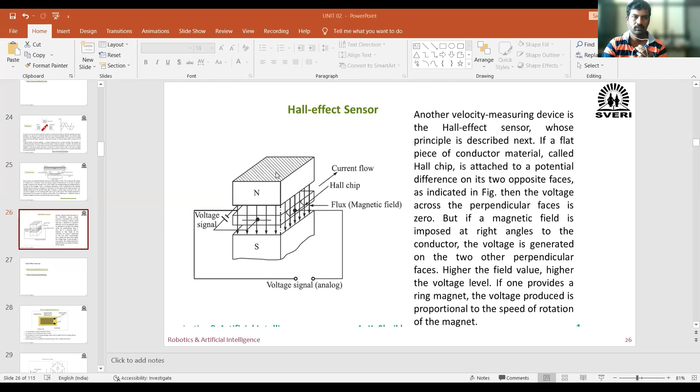In the last session, we finished up to the Hall effect sensor. We also covered strain gauge based sensors, piezoelectric based sensors, and at last we saw the limit switches. In the last lecture we finished up to this point.

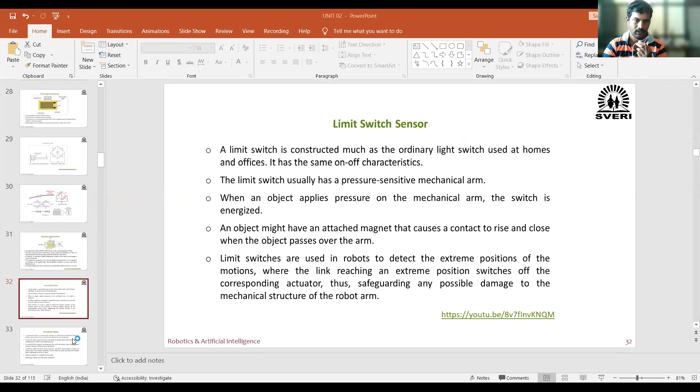Today we will start with the next topic, pneumatic switch. We'll look at the function of the pneumatic switch and where we can use it. All these are some of the sensors used in our robots.

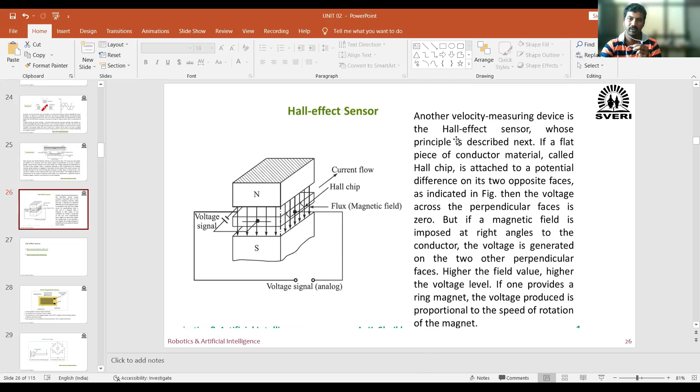Next we have seen videos related to that one. Again, strain gauges - yesterday we saw strain gauges. These gauges are used to measure the force and strain.

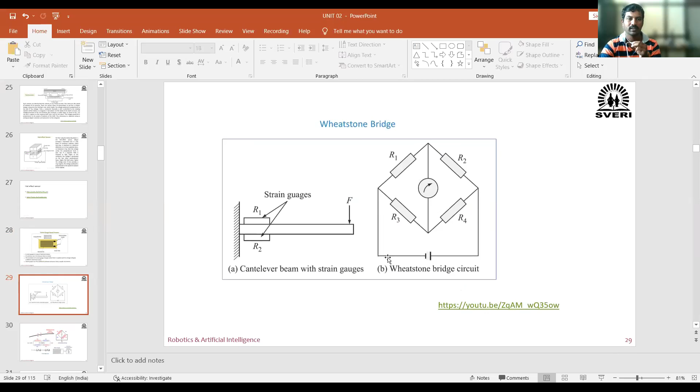In that strain gauges we are using this Wheatstone bridge circuit. Last time we discussed this. Next, piezoelectric based sensor.

If you put some piezoelectric material like quartz between two metal plates, the property of quartz is that if we apply force on it, it will produce a small voltage, some microvolts, inside that material. The amount of voltage we measure can be converted depending on how much pressure is produced inside it.

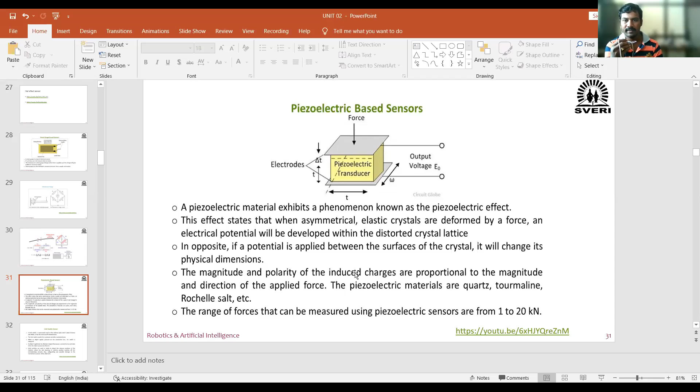Again, last time we have seen limit switches and where we can use them. A limit switch is similar to our on-off controllers or the switches in our home appliances. The function of a switch is to turn on and off that light, fan, or any electric instrument.

Similarly, in our robots also we have to feed switches to turn on and off, and in front of that switch we have written 'limit'. Limit means for a specific interval that switch should be on, either on or off. For that we require this limit switch sensor. There are different types of limit switches.

Pressure sensing limit switches are there, or we can say hydraulic limit switches, pneumatic limit switches, electrical limit switches are there. Those are used in our home appliances - these are the electrical switches. Similarly, switches we can put inside our robot to control the movement of the robot.

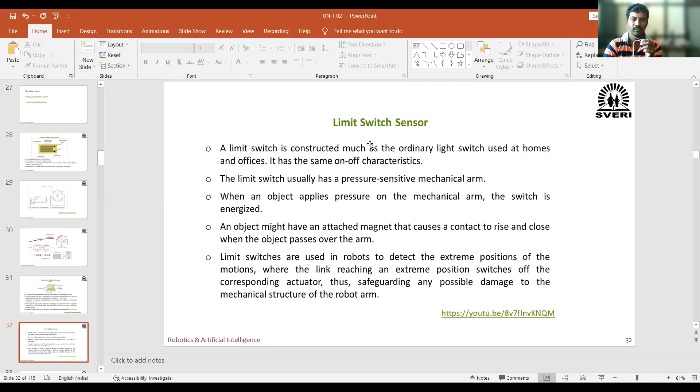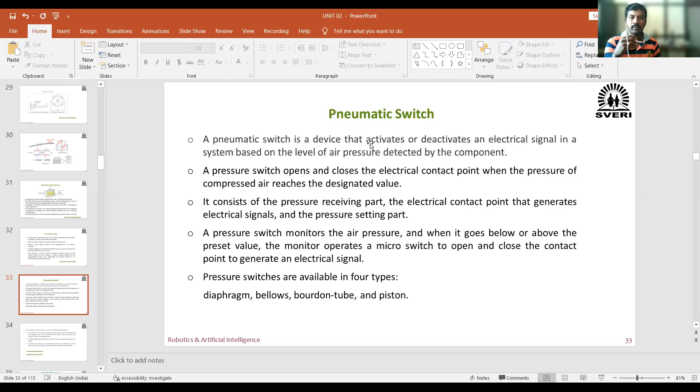We have seen the video of how actually the limit switch is working. Now we will move towards the next switch, the pneumatic switch. These switches are used for activating and deactivating electrical signals, or simply to control the movement of the robot arm.

This pneumatic switch is similar to our electrical switches. The only difference is, to control that switch, we require pneumatic power, meaning air power. With the help of air power, we can control the switch movement, either on or off, based on the level of air pressure detected by the component.

You simply remember that a pneumatic switch is similar to our electric switch, used for turning on or off electrical signals with the help of pneumatic or air pressure. If we turn on or off with the help of air pressure, we call those switches pneumatic switches.

A pressure switch opens and closes the electrical contact point when the pressure of compressed air reaches the designated value, meaning a certain amount. Suppose you take the example of your cooker.

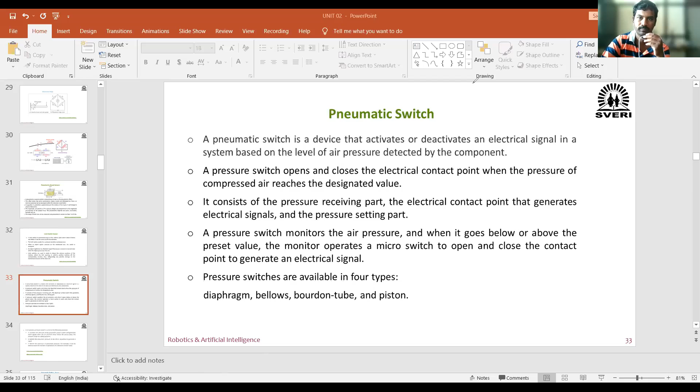Now we will go to the next slide. I will close this one. Why it is not going?

Pneumatic pressure switches are used for the following purpose. What is the purpose behind using these switches? It monitors the pressure of pneumatic power source and generates alarm signals when the air pressure drops below the preset value. The pressure stops for safety purpose.

Safety purpose also we can use such kind of pneumatic switches. It detects the pneumatic pressure of the driver apparatus to generate a signal. It detects the operations of pneumatic pressures. For example, it can be used to count the number of operations of a direction control valve.

Okay, one video with us. Just we will see that and we will understand how actually it works, and after that we will see the rest.

Let's take a quick look at how an SOR mechanical pressure switch works. It all starts when liquid or gaseous pressure moves a piston that in turn operates a switch. The process puts its pressure on one side of the piston and the switch is on the other. Add a spring so the piston can return to its original position when the pressure drops, and you have a mechanical pressure switch. Pretty simple, huh? However, while early pressure switches were sound in principle, they didn't perform well because of some inherent problems. First of all, because the piston must travel a long distance, it subjects the sealing ring and the switch to considerable wear and leakage. SOR solved those problems. In 1956 it started using a non-moving, O-ring seal design.

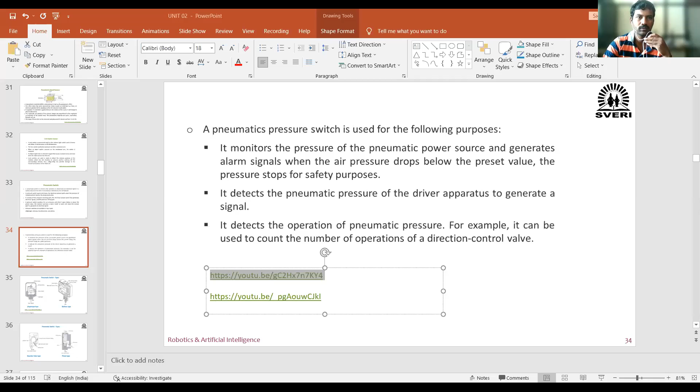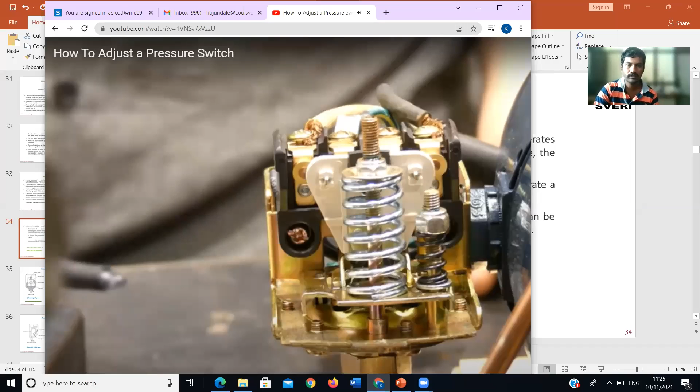Remember, before attempting any adjustments, be sure to turn off the breaker or disconnect power going to the switch or to the pump. You can find the factory preset settings inside the cover or on the box of the pump. This particular one is preset.

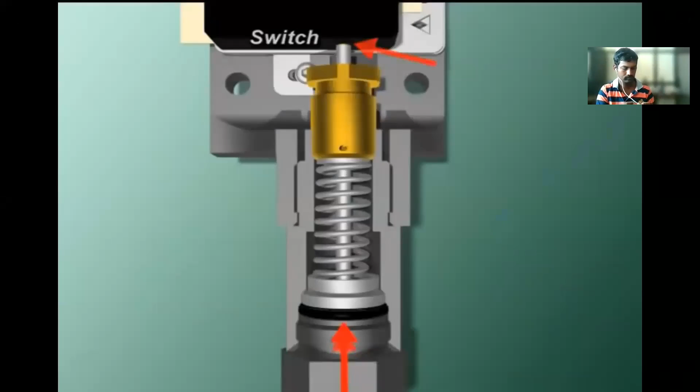Let's take a quick look at how an SOR mechanical pressure switch works. It all starts when liquid or gaseous pressure moves a piston that in turn operates a switch. The process and its pressure are on one side of the piston, and the switch is on the other. Add a spring so the piston can return to its original position when the pressure drops, and you have a mechanical pressure switch.

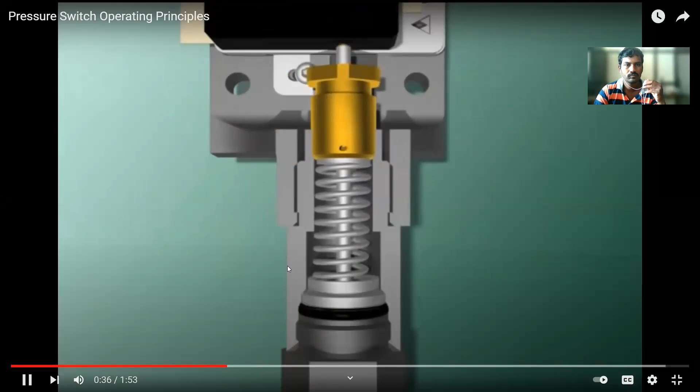Pretty simple, huh? However, while early pressure switches were sound in principle, they didn't perform well because of some inherent problems. First of all, because the piston must travel a long distance, it subjects the sealing ring and the switch to considerable wear and leakage.

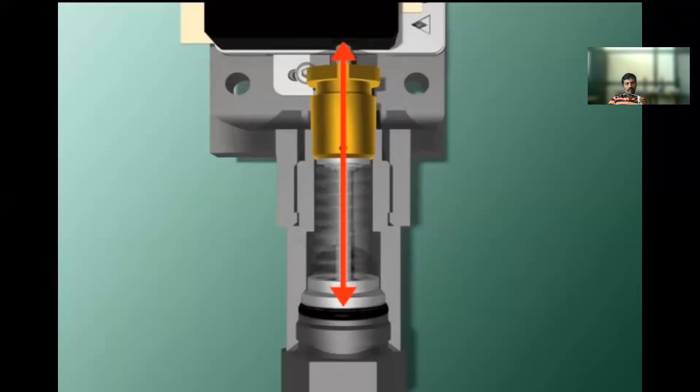SOR solved those problems in 1956 by using a non-moving or static O-ring and a diaphragm between the process and the piston head. The static O-ring and diaphragm keep the switch dry. For that matter, even the piston stays dry. And because the O-ring remains static at all times, it doesn't suffer the wear a moving part would.

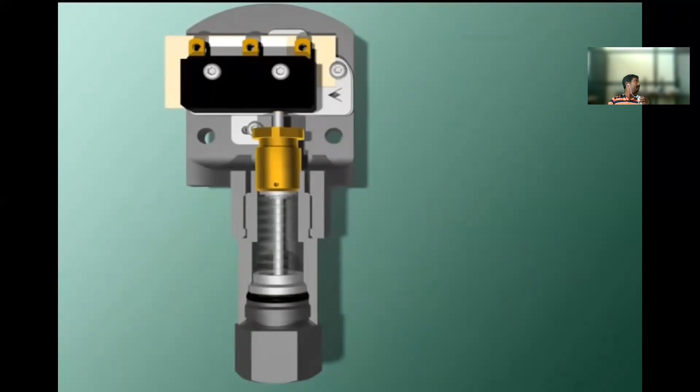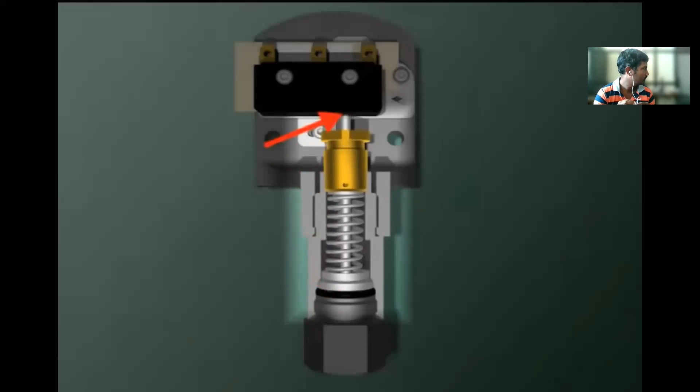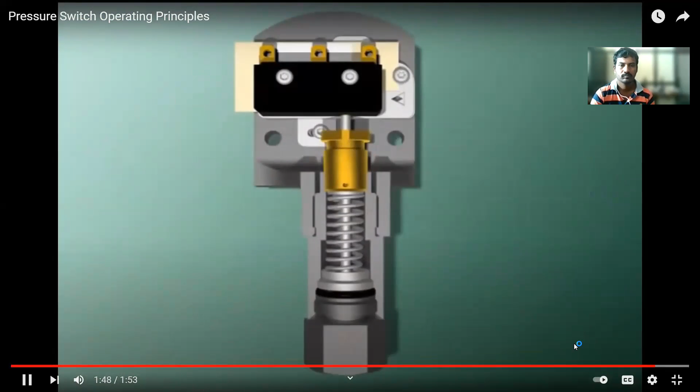Let's review. Pressure moves the diaphragm, which pushes against the piston. A calibrated spring and area of piston determines how much pressure it takes to move the diaphragm. As the diaphragm moves, it flexes and presses against the switch. The switch activates to control whatever causes the pressure to build up, such as the addition of reactive chemicals to the mixture, amount of gas or liquid in the process container, and so on. When the pressure diminishes, the spring takes over and the piston returns to its original position.

Okay, I hope you understood this one. So one more we have. Just let's see how it actually works.

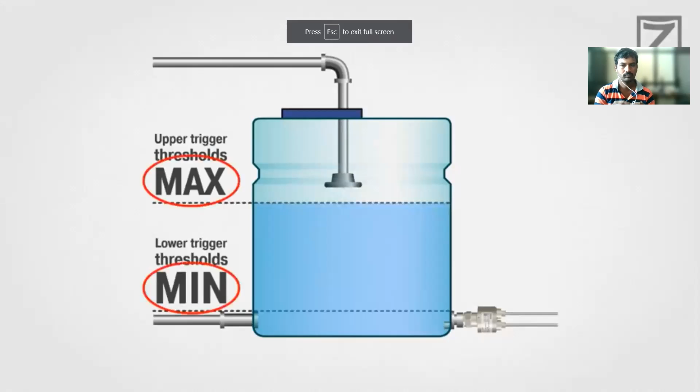There are several common applications, such as activating a light or sound alarm when a certain level or pressure threshold is reached. The switch has upper and lower trigger thresholds. A pressure switch can be used to switch the pump on or off when the liquid level reaches the lower or upper limit.

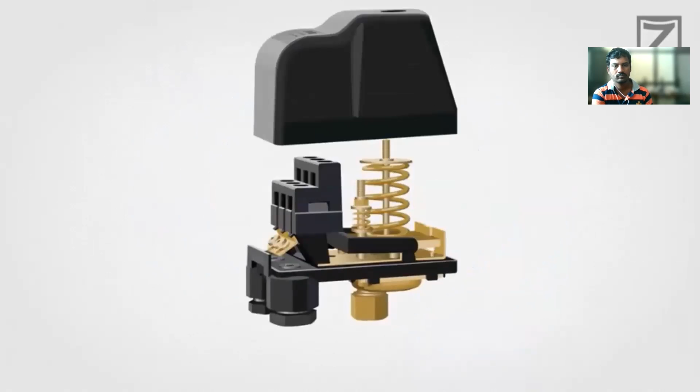Electronic and mechanical pressure switches. There are two main types of pressure switches: a mechanical pressure switch and an electronic pressure switch. In a mechanical pressure switch, a diaphragm closes and opens the circuit when the medium pressure rises or drops to a certain set value.

Electronic pressure switch: An electronic pressure switch is based on a pressure sensor element and an electronic board that ensures precise switching thresholds, along with a virtually wear-free solid-state relay to switch the load.

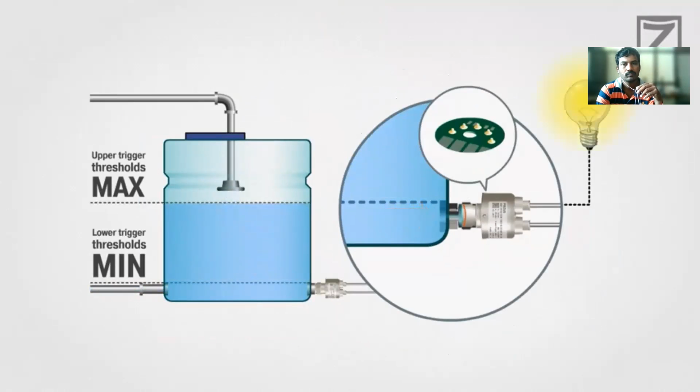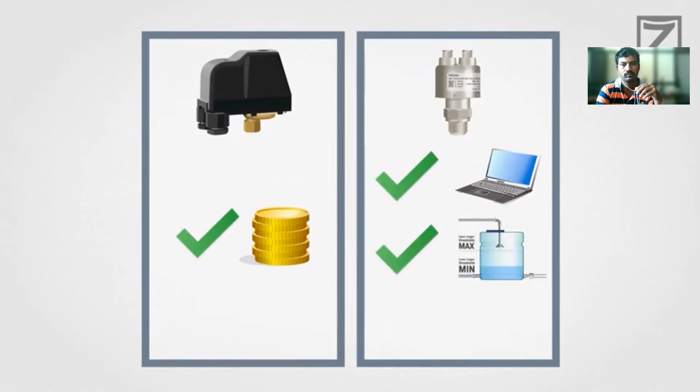The pros and cons of mechanical and electronic pressure switches: mechanical switches are usually the cheapest solution. Electronic pressure switches are normally more accurate and reliable than mechanical ones. They feature easy programming of the operation logic and triggering thresholds. An electronic pressure switch can be equipped with analog and digital outputs and thus also serve as a pressure transmitter. Various models have digital displays for easier measurement reading.

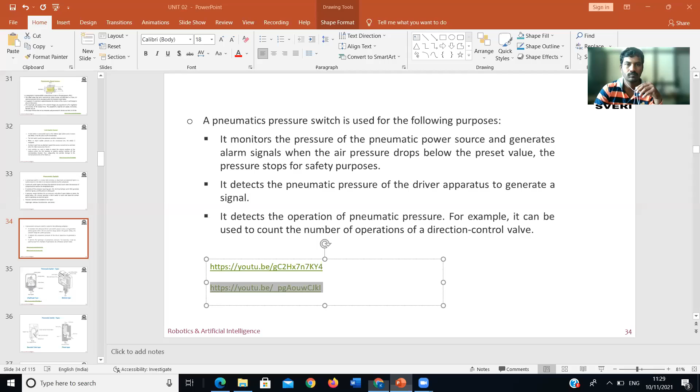Okay, I hope you understood. Now we will see there are different types of pneumatic switches. First one is diaphragm type, bellows type, Bourdon tube type, and piston type.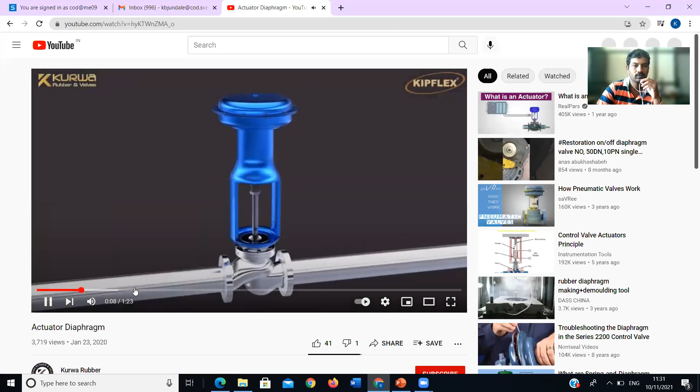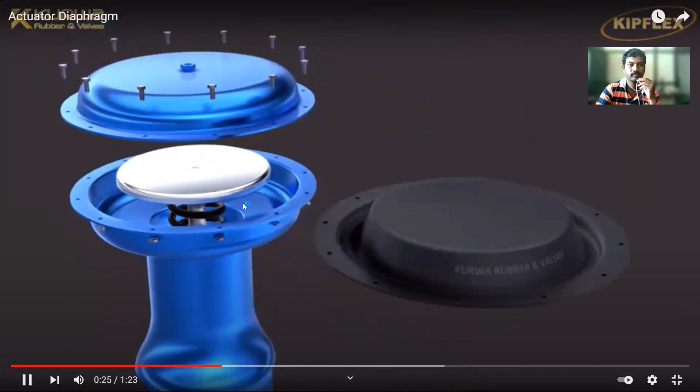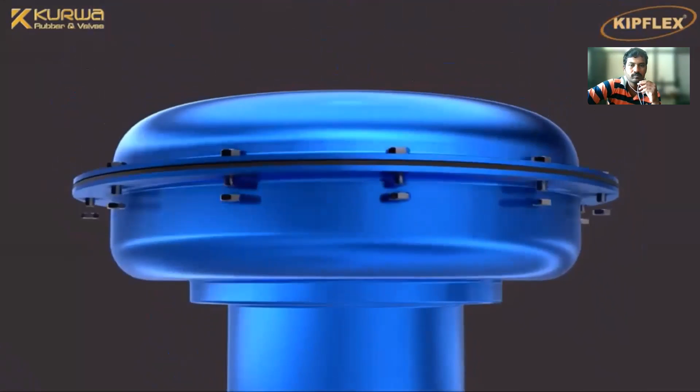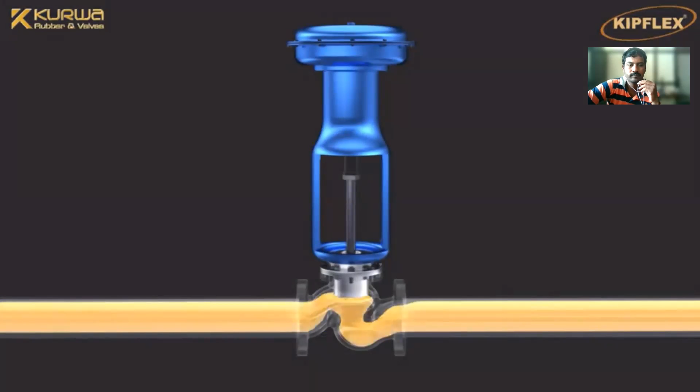You can see this one in diaphragm. Yes, see this one. This one is the diaphragm. Below that spring is there. Plate is there, actual diaphragm, this one. And this is closed condition. When it exceeds the pressure, it will open. Okay, such kind of. I hope you understood this diaphragm type.

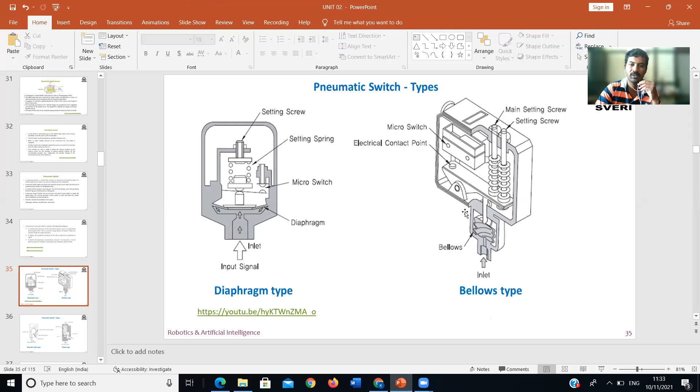Next, bellow type. In bellows, you can see here there are two springs. This one is the bellow. Bellow is similar to your balloon, and if we extend it - if more air goes into a balloon, it expands. Similarly, if we increase the pressure, it will start expanding and connect to the switch, and depending upon it, it will adjust the pressure. This one is the bellow type.

Next, Bourdon tube. In Bourdon tube, one Bourdon tube is consist. If we increase the pressure, it will start deflecting this tube. Due to deflection, it will connect the switch and release the pressure. And the last one is the piston type. We have seen that in the first video. It is similar to your piston type pneumatic switch. When we increase the pressure, this piston will move to the upper side and connect that electronic switch, and it will release the pressure.

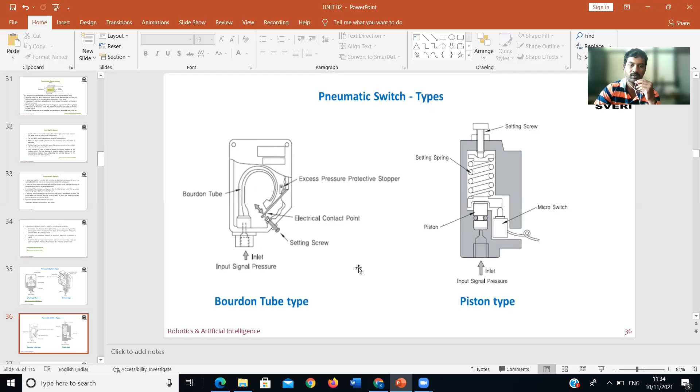Next, pressure transducer. This device is used to convert mechanical pressure into electrical signals. Whatever mechanical pressure is there, the work of converting it into electrical signal is done by our pressure transducer.

There are different types of pressure transducers available, again depending upon the fluid. If air is there, we call it pneumatic pressure transducer; if oil or water, then hydraulic pressure transducer. There are different types of fluids we can use to convert pressure into electrical signals. Simply remember that a pressure transducer is an element that will convert pressure into some electrical signal.

Whatever mechanical or electrical element it is, that element is called a transducer. Transducers are variable pressure sensors used to measure deflection and resistance. The producing signal will be either voltage, current, or frequency based on applied pressure. This pressure transducer, depending upon it, will generate either voltage or frequency.

Over the years, the terms sensor, transducer, and transmitter have become confusing because they're often used interchangeably and indiscriminately by different vendors. The terms sensor and transducer have been around for a very long time, but in the world of process control, the term transmitter is not very old. In particular, the term transducer is tossed around as a name for many devices and instruments. If you conduct a web search of the terms sensor and transducer, you'll get lots of different definitions. Sensor and transducer have often been used as synonyms.

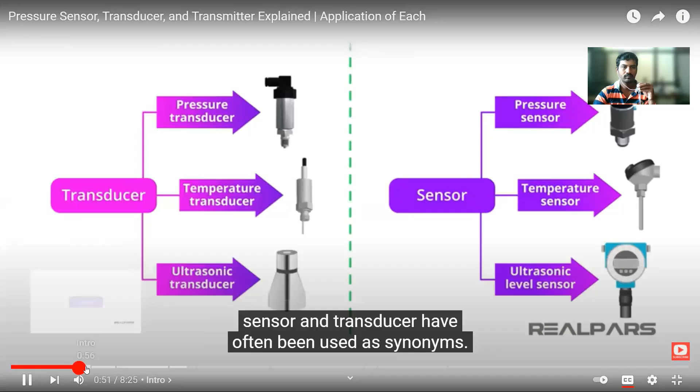Let's start with sensors. A sensor is a device that makes physical contact with the variable being measured, detects changes, and provides a corresponding output signal that can be measured.

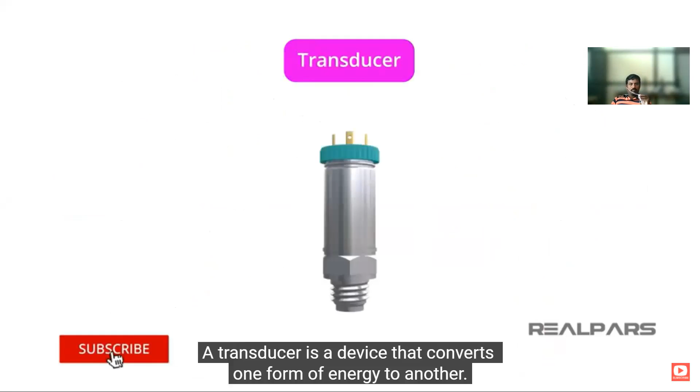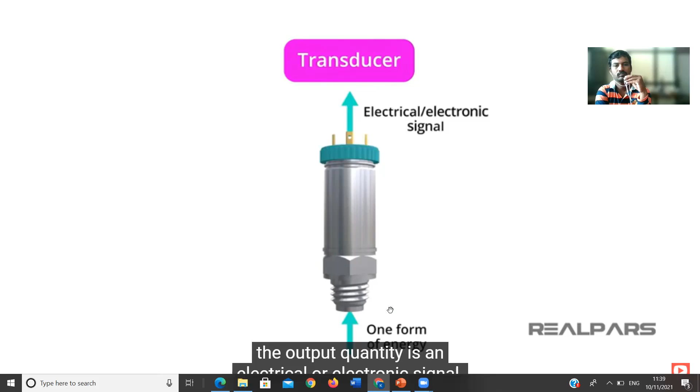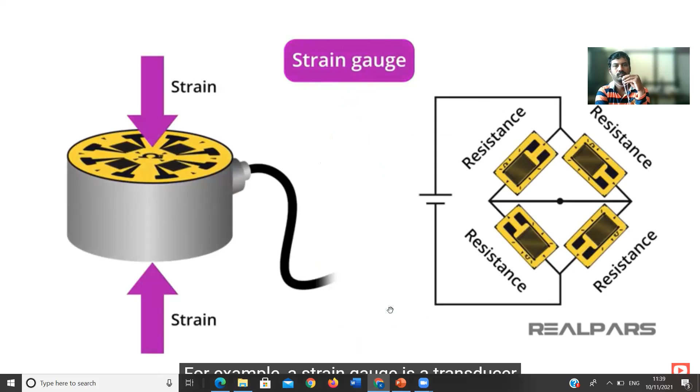A transducer is a device that converts one form of energy to another. A transducer provides an output quantity having a specified relation to an input quantity. In the field of instrumentation, the output quantity is an electrical or electronic signal. So we say that a transducer measures pressure, load, force, or other states, and converts the reading into an electrical or electronic signal. For example, a strain gauge is a transducer whose resistance value changes proportionally to the strain it experiences.

Here's an interesting statement: all sensors are transducers, but not all transducers are sensors. What do we mean by that? Well, consider a loudspeaker that converts an electrical signal into motion. The loudspeaker is a transducer, but not a sensor.

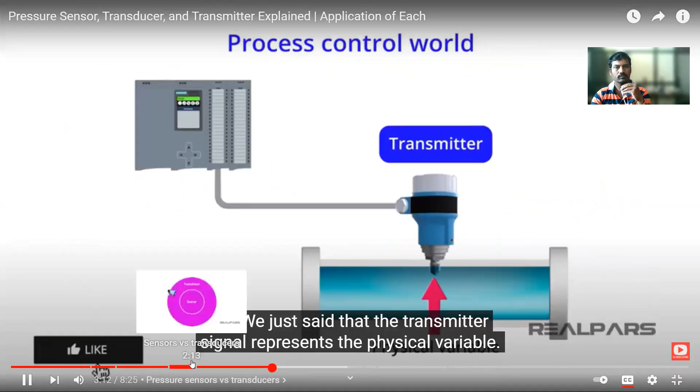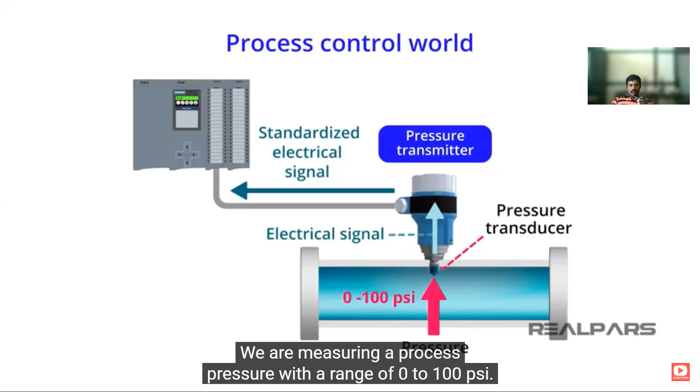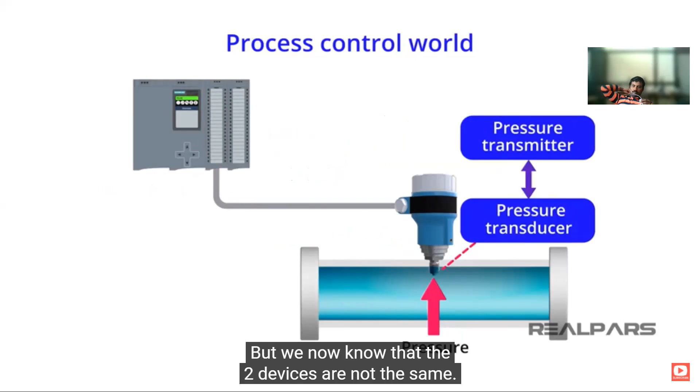Our sensor transducer performs the initial measurement and converts it to an electrical signal of 0 to 3 millivolts. The transmitter then converts that signal to a standard signal of 1 to 5 volts, which is received by a PLC analog input module. Many vendors use the terms pressure transmitter and pressure transducer interchangeably, but we now know that the two devices are not the same. So it's buyer beware. If you're curious, conduct a web search of the two terms.

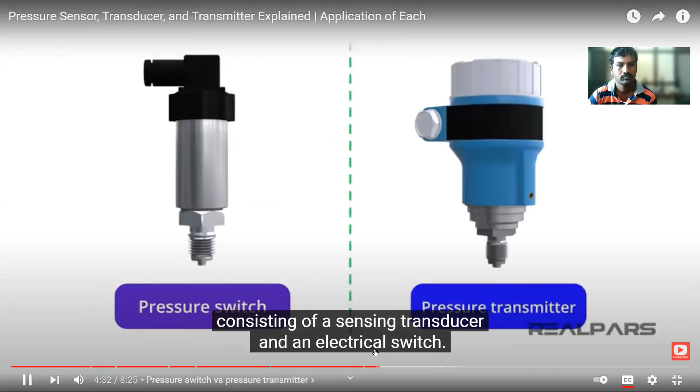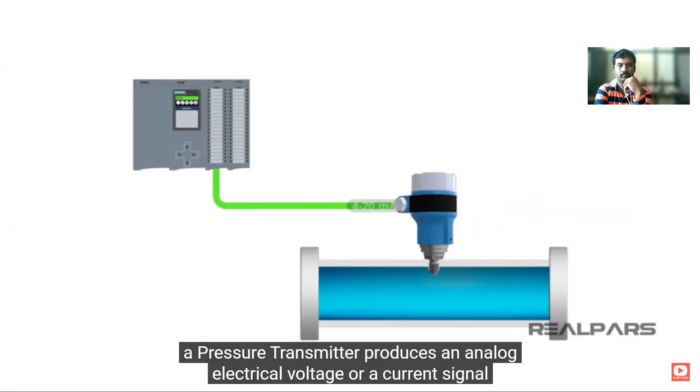Is a pressure switch different than a pressure transmitter? As we've already discussed, a pressure transmitter produces an analog electrical voltage or current signal representing 0 to 100% of physical process pressure. A pressure switch has electrical contacts that open and close at a specific pressure.

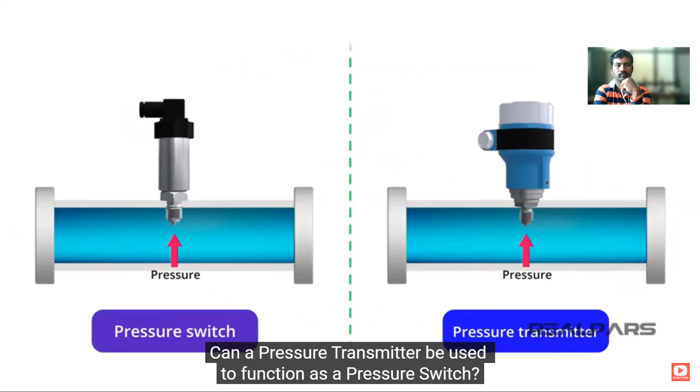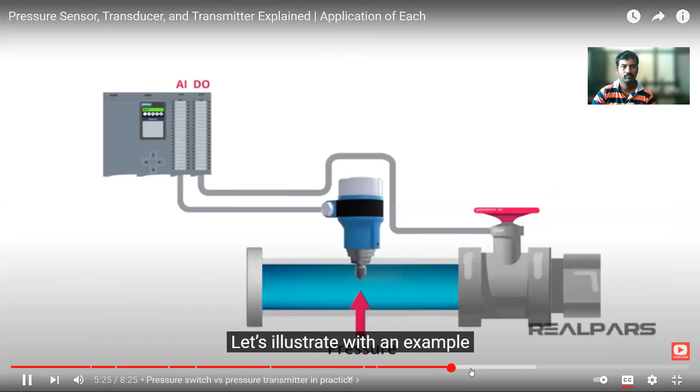Can a pressure transmitter be used to function as a pressure switch? The answer is absolutely yes. But is it really worth it? First of all, a pressure transmitter is larger, more expensive, and for example, a transmitter calibrated to produce a 4 to 20 milliamps output for a pressure range of 0 to 100 psi would require an analog input module on our PLC, and we'd need to scale the analog module and insert code into the PLC.

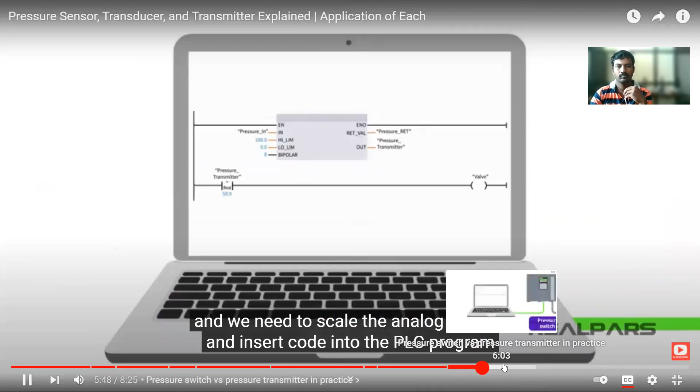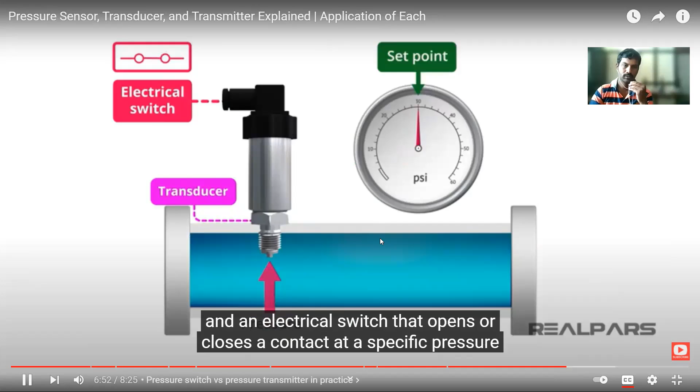To start with a sensor: a sensor is a device or element that performs the initial measurement of a physical variable. All sensors are sensing transducers, and an electrical switch that opens or closes a contact at a specific pressure works differently. A pressure transducer is a device that converts the physical measurement to an electrical signal, and when applied as a pressure switch, it is not quite the same thing.

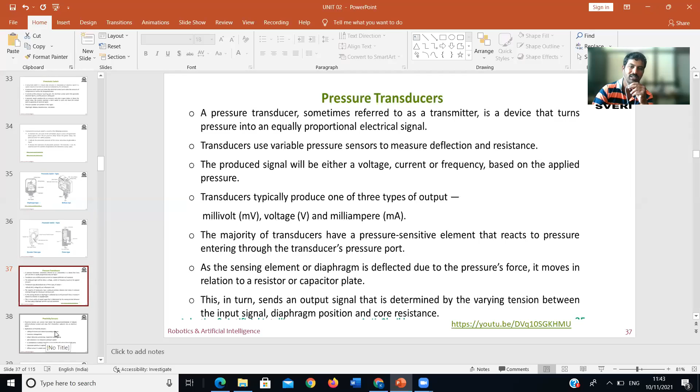Next one is the proximity sensors. This one is very important because nowadays all machineries are using these proximity sensors. Previously they used limit switches to detect the position of any object. If you wanted to define the position of an object, at that time they used to use limit switches. But now you can see everywhere they are using proximity sensors.

Proximity sensors are sensors that detect the movement or presence of an object without physical contact. So it is a sensor whose job is to sense an object, whether it is in movement or present in front, it will detect it. This proximity sensor does this work without touching the physical object - it will sense it. Such a sensor is what we call a proximity sensor, which detects movement or presence without physical contact, meaning without touching the object.

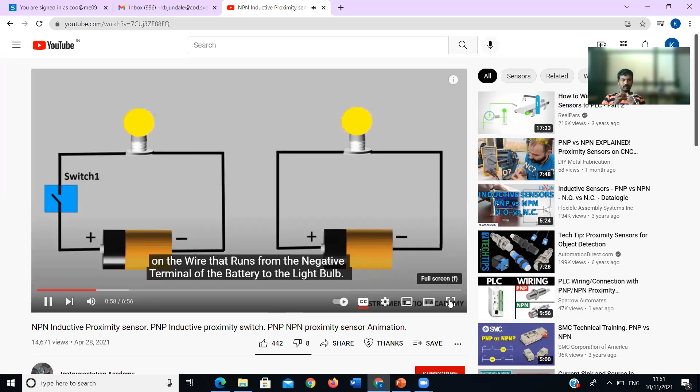of the bulb. This can be done in two ways. The first way is to install switch on the wire that runs from the positive terminal of the battery to the light bulb. The second way is to install switch on the wire that runs from the negative terminal of the battery to the light bulb.

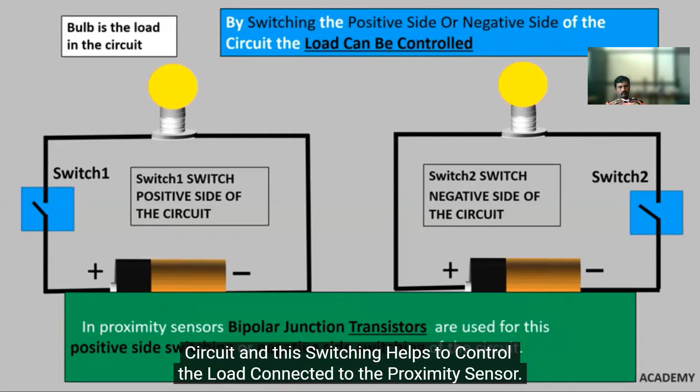Switch 1 is set to switch the positive side of the circuit, while switch 2 is set to switch the negative side of the circuit. Here the bulb connected in the circuit is the load. By switching the positive side or the negative side of the circuit, the connected load can be controlled. In proximity sensors, bipolar junction transistors are used for this positive side or negative side switching, and this switching helps to control the load connected to the proximity sensor.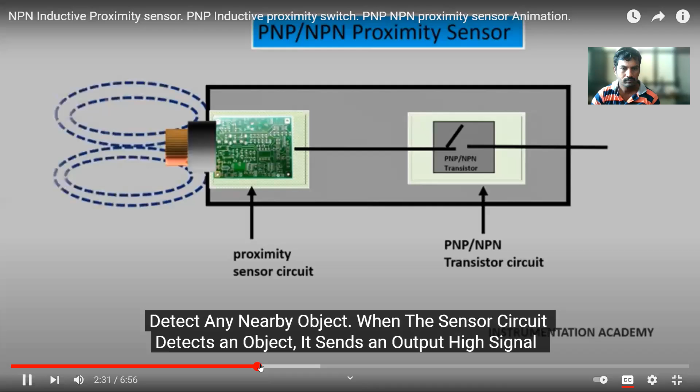Bipolar junction transistors are of two types, NPN transistor and PNP transistor. A PNP or NPN proximity sensor consists of a proximity sensor circuit and a PNP or NPN transistor circuit.

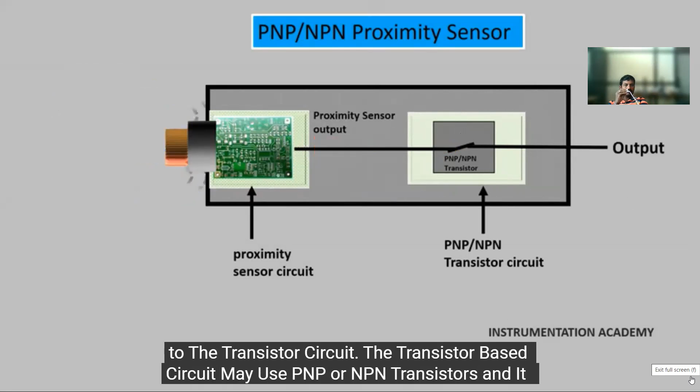The purpose of the sensor circuit or proximity sensor circuit is to detect any nearby object. When the sensor circuit detects an object, it sends an output high signal to the transistor circuit. The transistor-based circuit may use PNP or NPN transistors, depending on the application that sensor is used for.

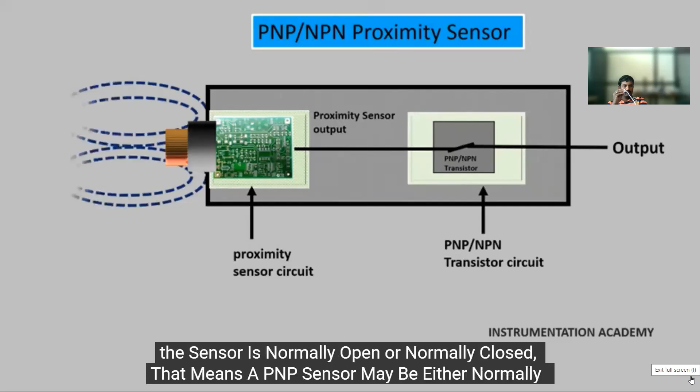PNP and NPN has nothing to do with whether the sensor is normally open or normally closed. That means a PNP sensor may be either normally open or normally closed. Likewise, an NPN sensor can also be normally open or normally closed.

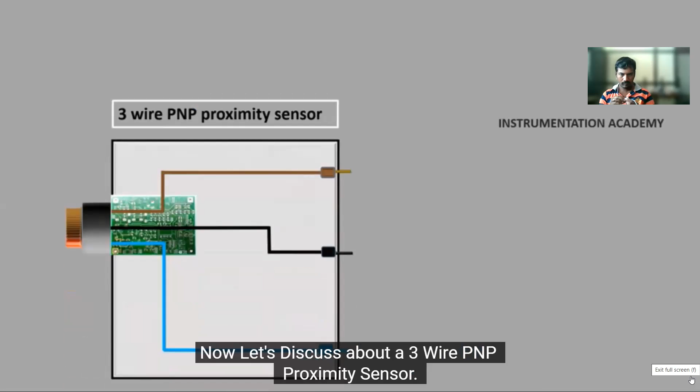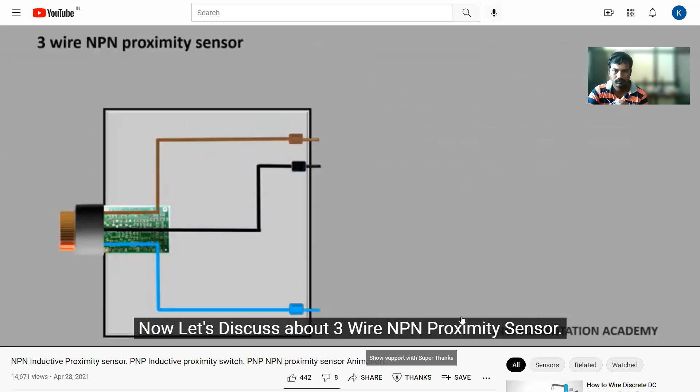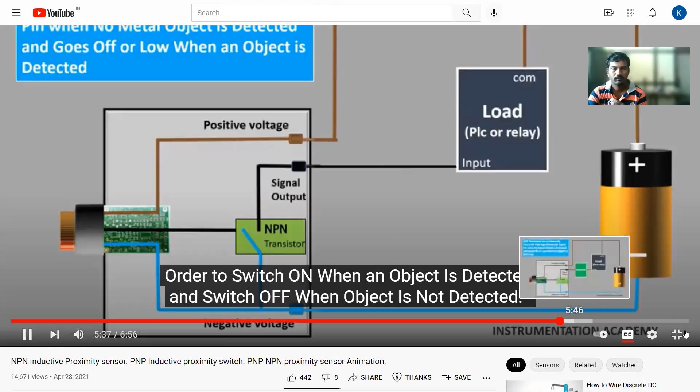As NPN transistors are naturally on, they emit a high signal on the signal line that has a voltage just below the voltage fed into the positive voltage pin, that is the brown pin. This high signal is fed into the input of an inverter, and the inverter inverts it into a low signal. Thus, with this low voltage, the bulb cannot be powered on.

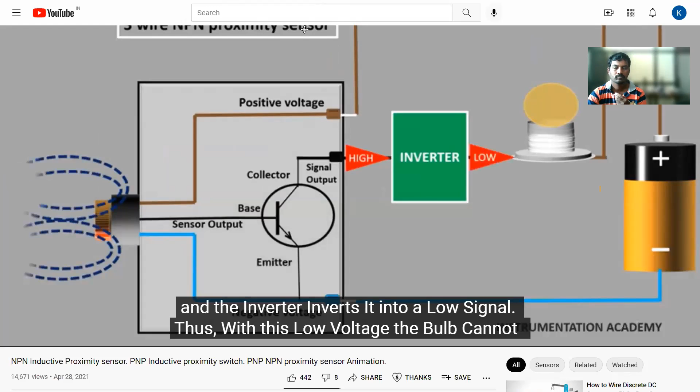When a metal object is detected, a low signal is emitted on the signal line of the transistor. This low signal is fed into the input of an inverter, and the inverter inverts it into a high signal. Thus, with this high voltage, the bulb is powered on.

I hope you understood this one. Next,

you can remember these proximity sensors are used for detecting the object, only metal objects, without contacting, without contact to our sensor. कुठलाही कॉन्टॅक्ट नसणार त्या दोन्ही ऑब्जेक्ट मध्ये.

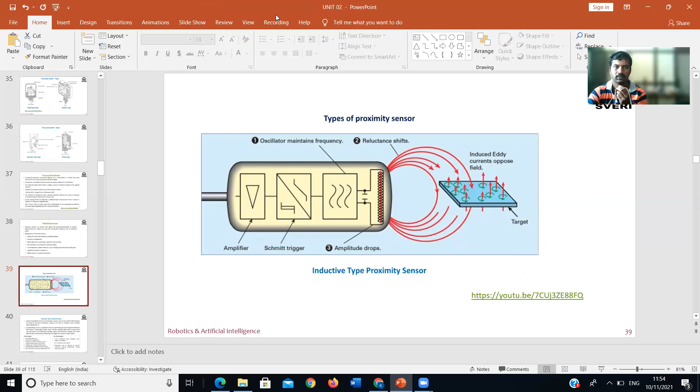Now it's time is 11:54. Yes, we will go through it and we will finish inductive. Next time we will start the capacitive one. Okay.

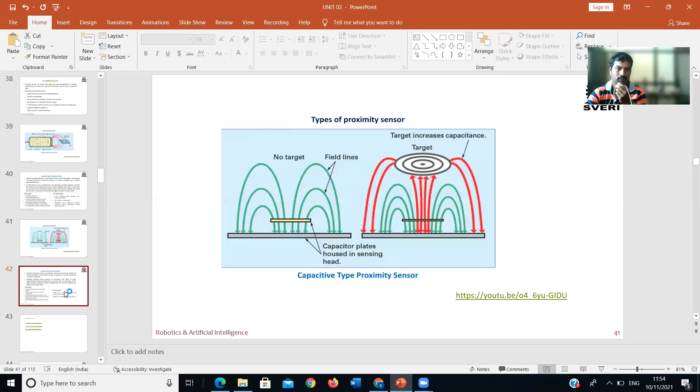Om Metkari, why have you written roll numbers? Should I have told you to write roll numbers?